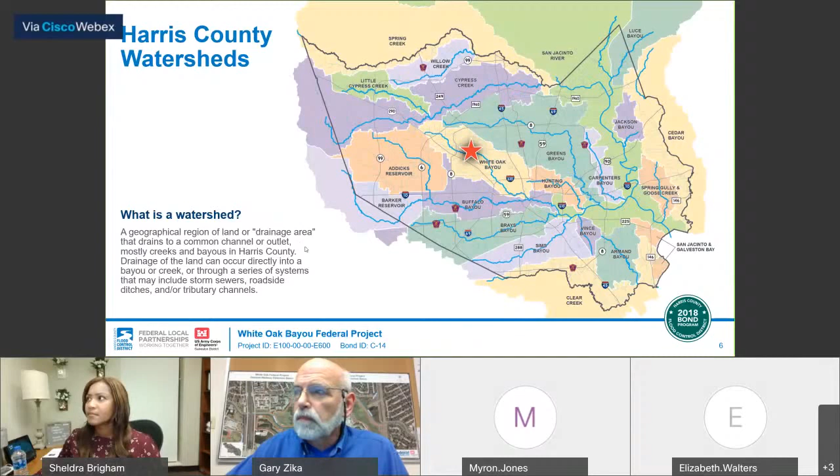Our area is flood prone, and here are some reasons why. The area is prone to extreme rainfall events such as hurricanes and tropical storms. The area has flat, slow draining topography or landscape, and the area has clay soils that do not absorb excess rainfall quickly.

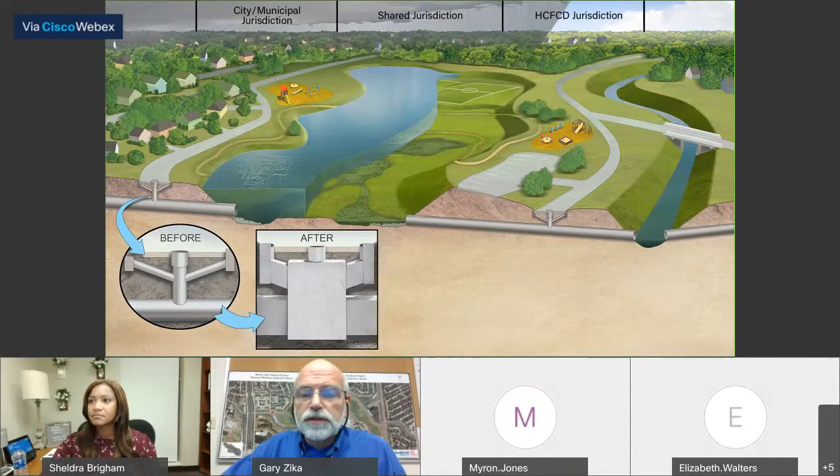On August 25th, 2018, the Harris County voters approved the $2.5 billion in bonds for flood risk reduction projects. This vote followed a series of meetings across Harris County and each watershed, which resulted in a list of what is now 181 bond projects. 149 of these 181 projects have been initiated so far, including 7 projects in the White Oak Bayou watershed.

A total of more than $680 million in partnership funding has been secured so far to stretch the 2018 bond program even further. The actual timing of each individual project will depend on a variety of factors, including the environmental permitting, right-of-way acquisition, and utility relocation, and in some cases, the requirements of the particular grants. That said, the project lists and project schedules are updated regularly on our website.

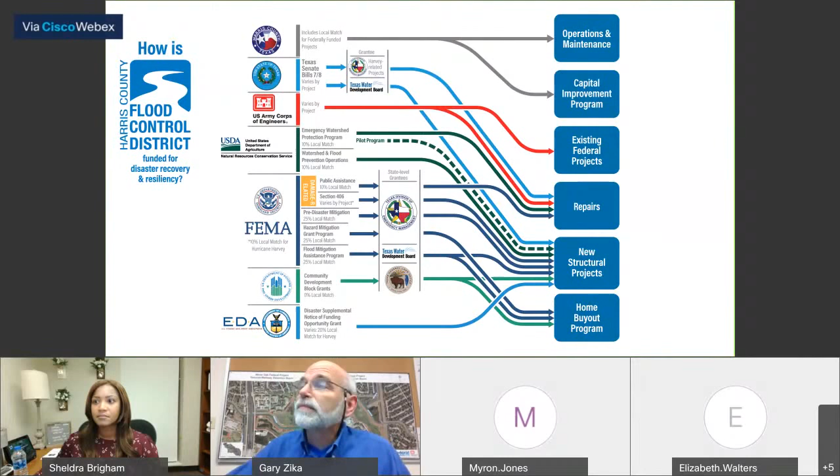Each agency has its own definition of eligible projects and its own requirements for local match funding, so the Flood Control District works diligently to match projects to the right partnership opportunities. For the White Oak project, we are partnering with the U.S. Army Corps of Engineers, displayed by the red lines on this slide. Now let's go about the project-specific information on the White Oak federal project.

White Oak Bayou is the primary drainage channel in the watershed. It flows from the northwest to the southeast, includes several tributaries, including Little White Oak Bayou, Brickhouse Gully, Cole Creek, and Vogel Creek. The bayou begins near US 290 and Huffmeister and flows 26 miles southeast to its confluence at Buffalo Bayou near downtown.

Beginning in the 1960s, the U.S. Army Corps of Engineers began work on the White Oak Bayou along an approximately 10.5-mile stretch between its confluence of Buffalo Bayou and upstream to Coles Creek. By the late 1970s, the Corps had proposed a new project to complete its work north of Coles Creek. Congress authorized U.S. Army Corps of Engineers to begin the project through the Water Resource Development Act of 1986. A decade later, Congress allowed the Harris County Flood Control District to be the lead agency on this project.

Under Section 211F of the Water Resource Development Act of 1996, the Flood Control District is responsible for the study, design, and construction of the White Oak federal project. The U.S. Army Corps of Engineers approves and reimburses the Harris County Flood Control District for certain costs on the identified project.

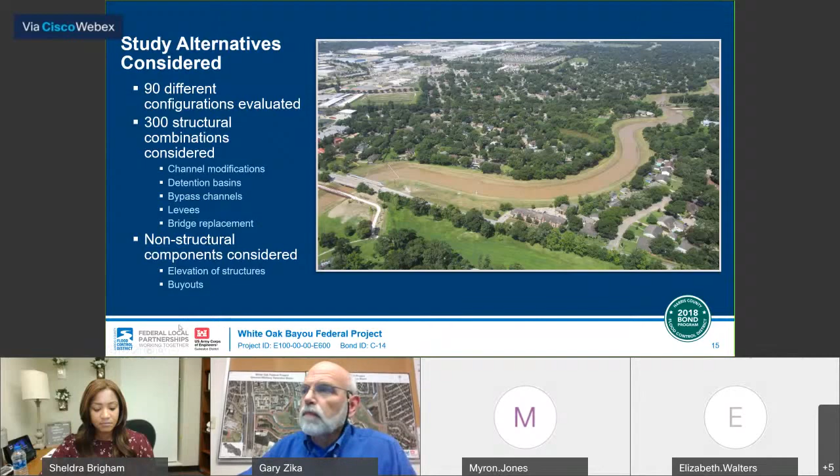Eventually, the U.S. Army Corps of Engineers approved the Harris County Flood Control District's recommended project to construct 6 new stormwater detention basins, the Jersey Village bypass channel, and modifications of the White Oak Bayou itself between Coles Creek and FM 1960. The total estimated cost for the project is $124 million.

We've already completed the majority of the work on the federal project, including excavating the new stormwater detention basins at Fallbrook, the Ranchstone Detention Basin, Beltway 8 Detention Basin, the 2 basins at Fairbanks North Houston, and at the Hollister and West Little York Road. In addition, the Jersey Village bypass channel has also been completed. Modifications to the White Oak Bayou itself are all that remain for this project.

Passage of the Bipartisan Budget Act in early 2018 included funding to complete the White Oak Bayou federal project, as well as projects in the Brays and Hunting Bayou watersheds. As mentioned, the total cost of the project is $124 million. This includes $29 million the flood control district has spent to acquire right-of-way and move utility lines. These costs will not be reimbursed by the U.S.

Army Corps of Engineers. Once we've completed the project, the Corps will reimburse us for the remaining $95 million of the project cost. Approximately $50 million of that has been spent on the 6 projects constructed to date. Finishing the White Oak Federal project will take an additional $45 million, which includes the recent completion of the excavation work on the Fairbanks North Houston Detention Basin.

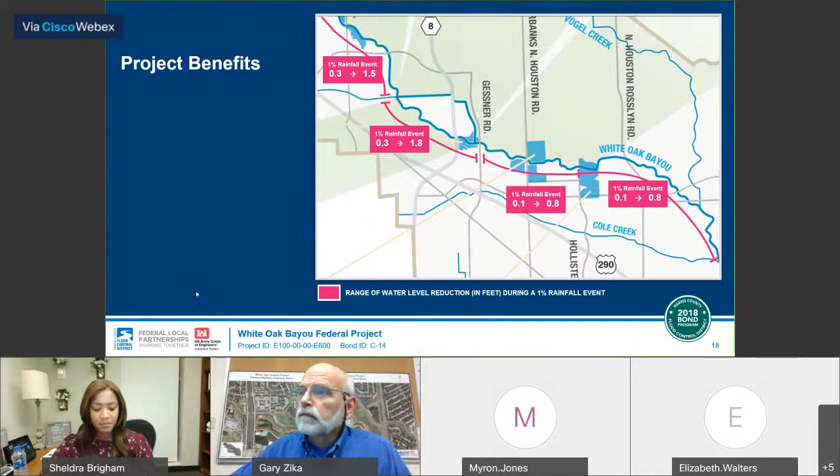During construction, in the interest of public safety, all trails along the White Oak Bayou between West Tidwell and FM 1960 will be closed for the duration of the construction period. This includes the bike and pedestrian bridge crossings east of Fairbanks North Houston and at the Alabonson Bridge. There may be some minor traffic delays and occasional lane reductions when construction is taking place near the bridges crossing White Oak Bayou.

The remaining construction activities have been broken into 2 separate projects. Today's meeting is about the construction of the 5-mile section from Hollister Street south to the confluence of Coles Creek near West Tidwell, which is expected to begin after the first of the year. Construction of the upstream section from Hollister Street to 1960 is already underway. Both projects should be completed by the end of 2021.

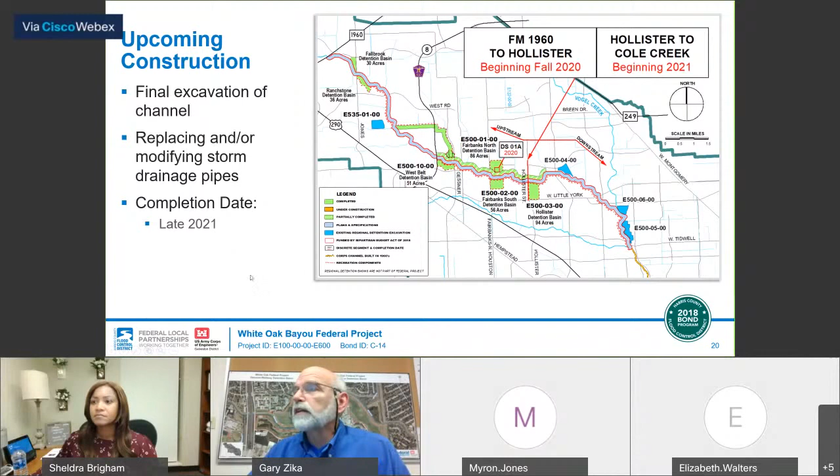In addition to the work of widening and deepening White Oak Bayou, we will also be replacing and modifying the storm drainage pipes that lead into the bayou itself. I will now turn the conversation back over to Sheldra to kick off the questions and answers. All right, thank you, Gary.

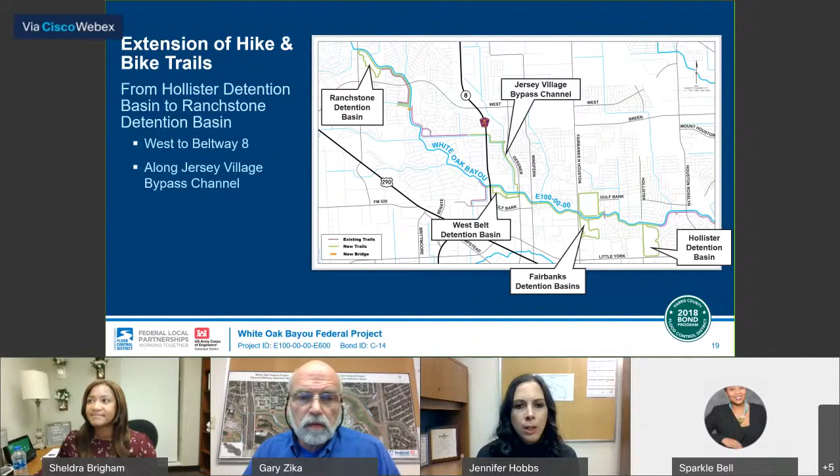And similar to Ray's concern, someone is wondering if the hike and bike trail will be continuous or if they will be extended. So a lot to unpack there for you, Jennifer. All right, thanks for the question. So as part of this project, we aren't building any pedestrian bridges. This project, we are connecting some of the existing trails.

Most of the trail work is being done on our upstream section, which is underway right now. That makes more of the connections. A lot of our connections here have more to do with the Hollister Basin. But as far as pedestrian bridges go, as we're not going to be building any, Harris County Engineering is actually in the process of designing one near DeSoto.

So there's one right there in the MUD district. I believe it's MUD District 9 that is going to be building another one near West Road. So there are a couple of other pedestrian bridges on the way that are going to be connecting the north to the south.

Thank you, Jennifer. Our next question is for Gary. And Gary, Patty is asking why homes are being bought that never flooded. For the federal project, most of the homes that were bought were along the bayou itself, and all those were deep in the floodplain. Their backyards are literally the bayou. All the homes that I'm aware of have all flooded in the past, not just usually once, but numerous times.

Some of the detention basins years ago that we did purchase might have had a few homes on there that didn't flood, but the majority of the homes for the federal project are homes that flooded. There are other projects that flood control is doing in the area, in this watershed, as I mentioned before. There's other bond projects in that area.

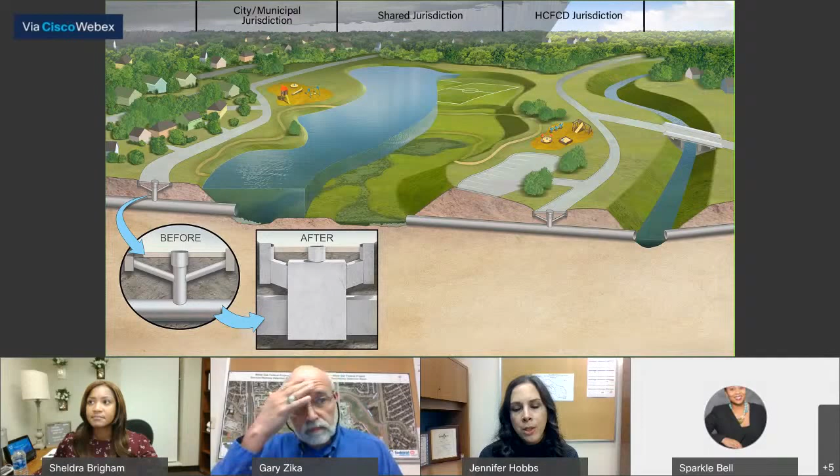Thank you, Gary. Our next question is for Jennifer. It's concerning street flooding in neighborhoods. Will the channel improvements have any effect on this? So as Gary mentioned in one of our previous slides, as far as jurisdiction when it comes to flood control versus city municipality or a MUD, our projects are primarily concerning the channels, and you can see that on the right of your screen. So our main purpose of this project is to reduce flood risk along the channel and

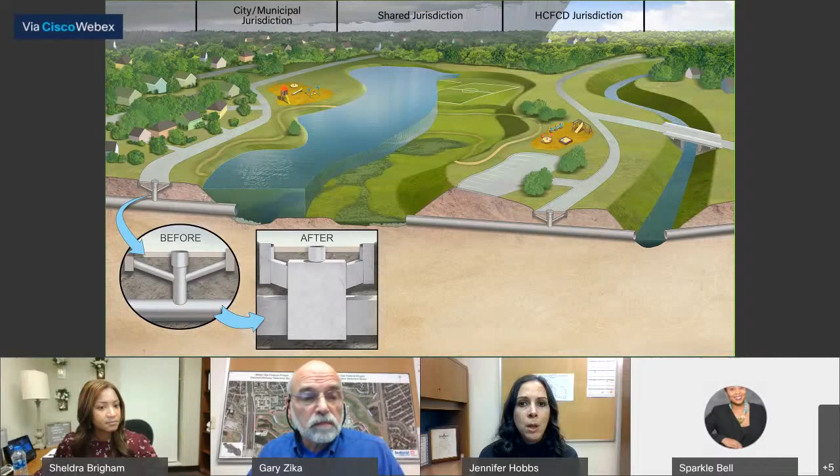through the channel. Now, you could see some benefit in your streets from this project, but likely a lot of that has to do with the municipal drainage. So I encourage you, if you're experiencing these sorts of issues, to contact your local municipality who oversees the storm drainage pipes along your road.

Thank you, Jennifer. Gary, we have someone saying they received an invitation to this meeting as well as one about Inwood, and they're asking if this project is related to the Inwood Forest Detention Project. Okay, the Inwood Forest is a detention facility on City of Houston property. It's the old golf course, the Inwood Forest Golf Course. They're two separate projects. We've been coordinating with them, so with the work that we're doing along the bayou there's an interface between the two projects, but it's a different project.

We're not going to go through the details of that project in this meeting. We're talking about the channel work that we've got to do on the federal project, and the meeting next week will be about the detention basin facility. So if you want to know about the detention facility, you need to attend that meeting also.

Thanks, Gary. And we also received a comment that concrete trails are great for cyclists, but hard on runners' knees. Can you tell us what materials the trails will be made of? Yes, basically the trails on this section that we're looking at are going to be made out of concrete, which is similar to what the Houston Parks Board is maintaining from Cole Creek up to Hollister now. We'll continue that same concrete material throughout the reach of our project.

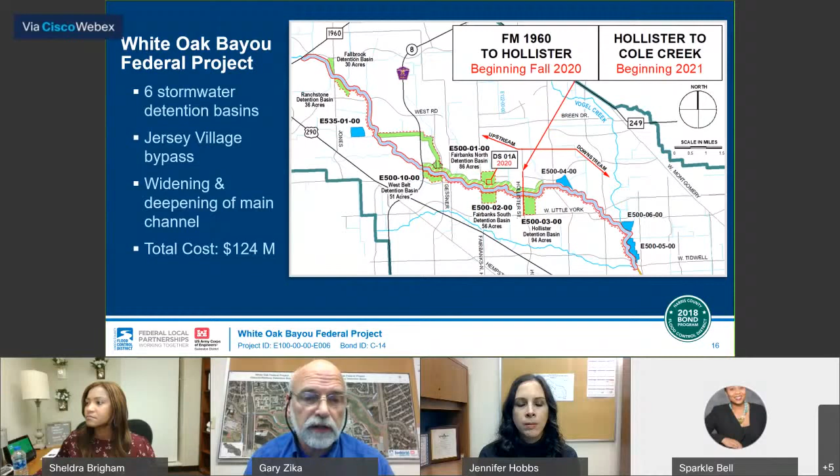We've broken that channel work up into two channel segments, one from Hollister all the way out to 1960, and that's the one that's already started. When we say already started, it literally started this last week. So the contractor's out there already excavating and starting some of the construction activities he has to do. The one that we're talking about at today's meeting is from Tidwell up to Hollister. It's a smaller section.

That's why it's going a little bit later than the other section. We hope to have that construction starting after the first of the year. We have to go out to bid and get prices to come in and award that contract. And so that'll happen after the first of the year. We hope to have construction start with all the construction on the channel work to be completed by the end of 2021. And a lot of that depends on weather sometimes.

There's a certain amount of weather delays that we have in our contracts, but if it's a really wet time, it's not as good for the contractor. He can't get as much work done. And if it goes the other way, if it's really dry and he gets good conditions, he may go a little faster. But the goal is to be done by the end of 2021.

All right, thank you, Gary. And we have a couple of people asking if there is any other flood mitigation work planned for the White Oak Bayou watershed.

And again, there are other projects. If you go to the website and look under the White Oak Watershed, you'll see that there's other bond projects listed. There's a couple detention basins. Well, actually, there's, I guess, 3 detention basins and some channel work on some of the tributaries. There's some repair work up and down the channel. So there is other work on the White Oak Bayou watershed.

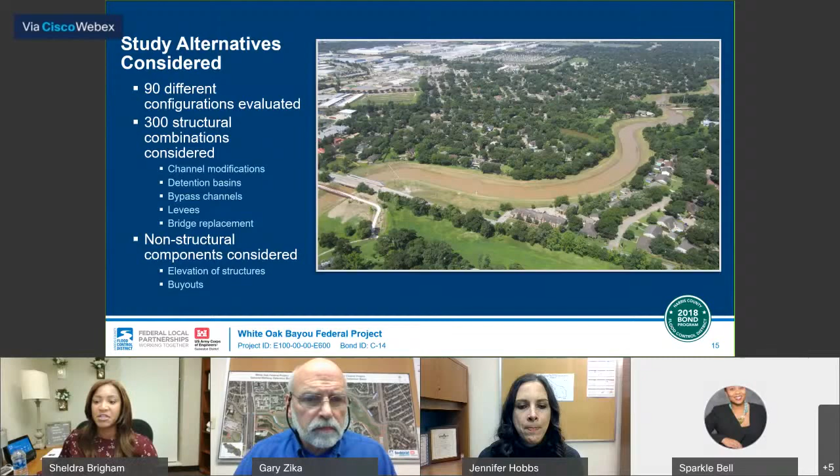And Jennifer, I'll go to you now and wanted you to go over some of the environmental considerations we're undertaking with this project. Sure. So with this project, like all of our flood control projects, we have to do what's called environmental due diligence. That's us surveying the area for any threatened and endangered species, or any other environmental things that could be impacted as part of this project. And if we were to run into any of those things, then we would have to follow all regulatory guidelines, be it from the Corps or another environmental agency or entity, and make sure we're doing everything we can to protect what already exists within the area. And so we did that with this project.

Thank you, Jennifer. And Gary, we got another question about the Inwood meeting, someone saying that they received a meeting notice and wondering if they need to attend that meeting as well. Yeah, the Inwood meeting, which is next Tuesday night, is about the Inwood Forest Detention Basin. That's a joint venture between the City of Houston and Harris County Flood Control. The City of Houston made an application and got a grant to complete that project. That meeting on Tuesday will talk about the specifics of that project rather than what we're doing along White Oak Bayou. It's going to talk specifically about the detention basin at Inwood Forest.

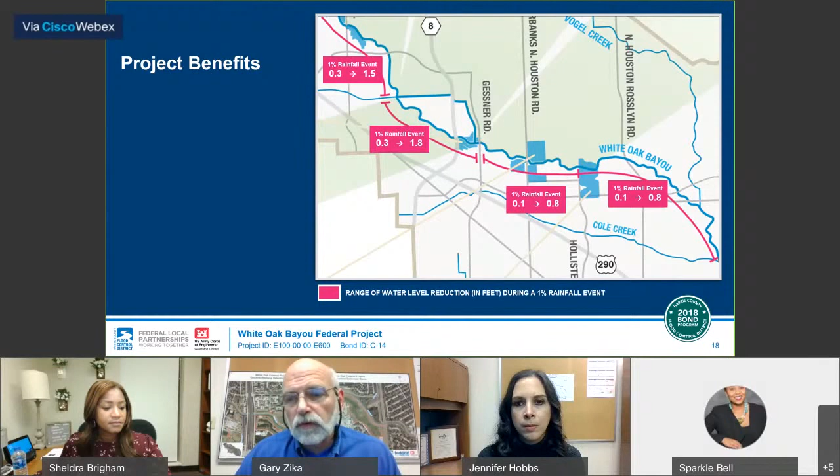The struggle with this project is doing it and not impacting anything downstream. We can't put water downstream on people. So the benefit starts out basically at zero at the downstream end. The benefit gets greater as you get around the Jersey Village area, and then it peters out as you get to the upper end of the project.

Okay. Thank you, Gary. Our next question is for Jennifer, and we mentioned this a little bit earlier, about any concerns with construction inconveniences. Can you talk more about the construction activities and when work will be performed? Sure. Gary talked about this, but our upstream portion from FM 1960 to Hollister is already underway. And with these tight construction windows, we have very tight schedules that the contractors have to meet.

So they're likely going to be stationed at multiple locations along the bayou at any time, and even more so once the downstream section from Hollister to Tidwell gets underway early next year. So we'll have all of the hike and bike trails closed along the channel, and that's for the safety of the public as well as the safety of the contractor, in order for him to do his work efficiently.

And there'll be interim one-lane closures along some of the bridges as needed. You won't see as many road impacts outside of some of those locations, and of course there will be more dump trucks. It is an excavation site, but they will be required to follow all safety protocols and all local noise ordinances and things of that nature.

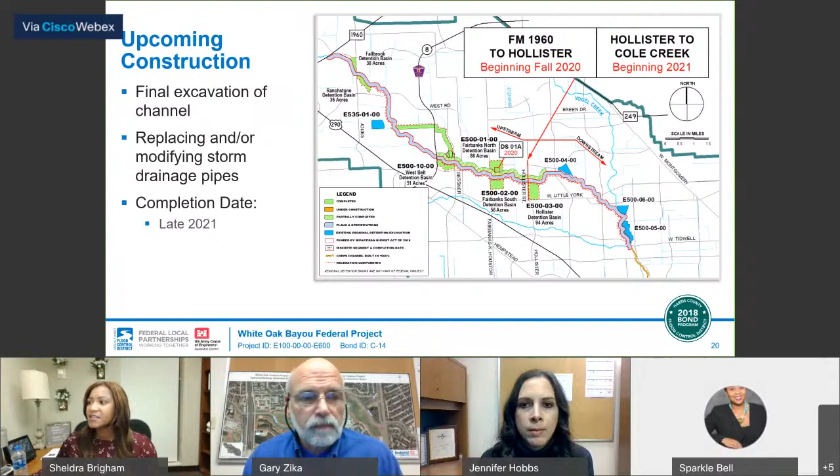And Jennifer, let's see. Catherine is asking, when will the trails be closed? So Gary really just covered that pretty well. As he said, there could be a small portion of the trail while the contractor's working that you glance over at and it appears fine to walk down or bike down. But then just around the corner, there could be a giant hole in the trail, and that's a huge safety issue. And so as far as when the trails will be closed, the upstream portion is underway.

So the contractor is in the process of going to all the different cul-de-sacs and different areas where you could enter into the trails for that portion of the project from FM 1960 all the way to Hollister. So he's in the process of closing that, as Gary said a little bit earlier in the presentation. We've already started the excavation work in that area. So they're going to be closing all those trails. I would be surprised if they weren't all closed before the end of the year.

Now, as far as the section from Hollister to Tidwell, that project is going to be advertised very soon, and we're going to start construction early next year. And so once we award that contract and the contractor is able to get his notice to proceed, then he's going to do the same thing there. He's going to close all the different portions and entryways along the trail, and he'll close it for the whole time during construction. And we have an expedited schedule, so we're trying to get it done as quickly as possible so it can be open to the public and fully built.